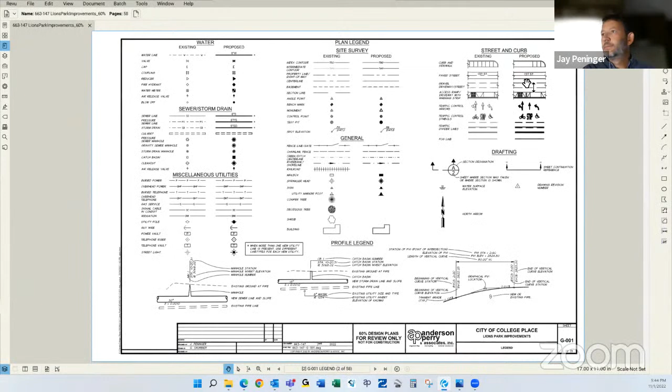So we've broken the site up into 4 areas just to make the plans work better. You see area 1, 2, 3, and 4. We'll zoom into each spot, talk about what's going on in each area, some decisions that are being made, and then go over the more interesting things like the playground equipment. I know parking lots and utilities aren't always the fun part, but let's go to that first area.

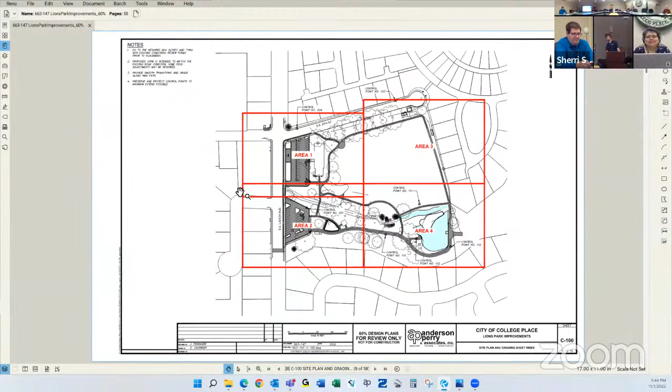So the northwest portion of the site is mostly the existing parking lot. We're updating that parking lot, keeping the RV sewer dump there. We've, with input from Public Works, realigned how the parking and the RV dump interact. We've got more accessible parking, and we're updating the accessibility into the existing building.

In this one, you also see the new playground just to the south of the existing building. Later on I'll show you a bit more. We are remodeling the bathroom there. One thing to note, the park board had comments on the islands within this parking lot, so we're going to address that between now and the next revision to make sure it's still as accessible as possible for the RVs.

So that's high level what's going on in this part. You can see the path that loops around the field - a big loop that goes all the way around the park with some workout equipment stationed around it, and it has lighting. We'll go through that lighting in a minute. It will have markers so you can know if you want to run a quarter mile 6 times, or whatever distance - there'll be signs for that.

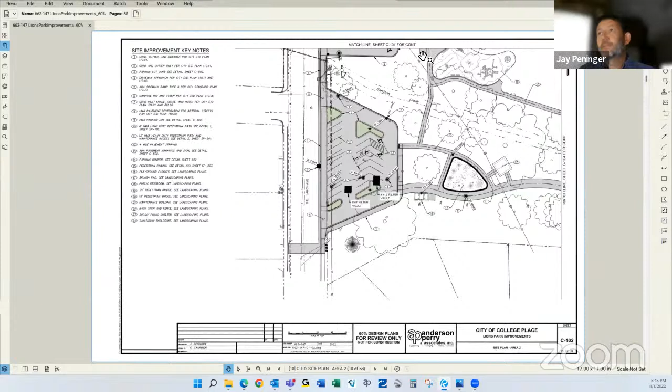The more exciting part of this is just east - you see the black triangle, that's the splash pad. Just to the south of that, southwest of that little rectangle, is the proposed restroom. To the east of the splash pad is the picnic shelter. There's a requirement for a splash pad to have a bathroom within it, so there will be 2 bathrooms in the park now. There's some bike parking here, and some up at the other area I didn't mention. The sculpture that's currently by the playground is being moved to that area.

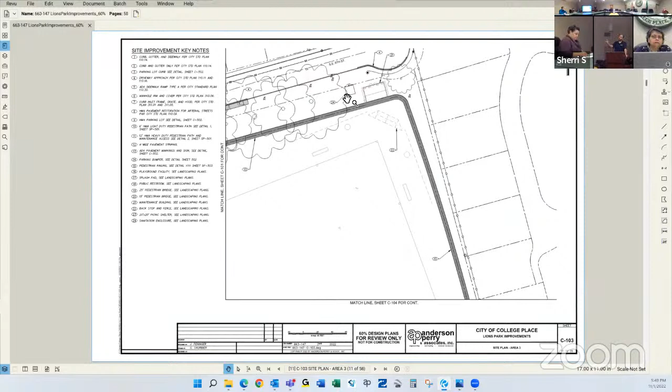The northeast corner doesn't have a whole lot to talk about, but there is a proposed maintenance storage building just north of the path, and a trash enclosure for the park. We will be putting in a new backstop - the existing structure will go away, but there'll be a new one. Again, you can see the path that goes all the way around the park. There's pedestrian scale lighting all around the walking path and plenty of lighting in the parking lots for cars.

Just a note here, the plan is to upgrade the irrigation within the entire field so that we get a nice product for the field. And then the last corner of the site is the pond and the stream.

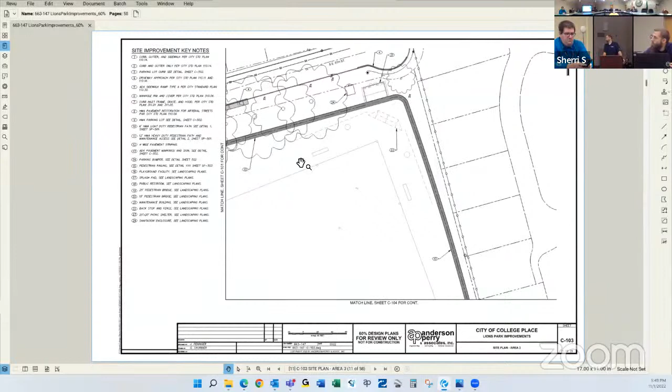Also in this area, we will have an aeration system that pumps air into the pond to keep circulation. Part of the couple issues with the current pond: it's so big compared to the amount of flow, and it's also off to the side of the creek, so circulation doesn't happen very well, and that pond gets a lot of algae.

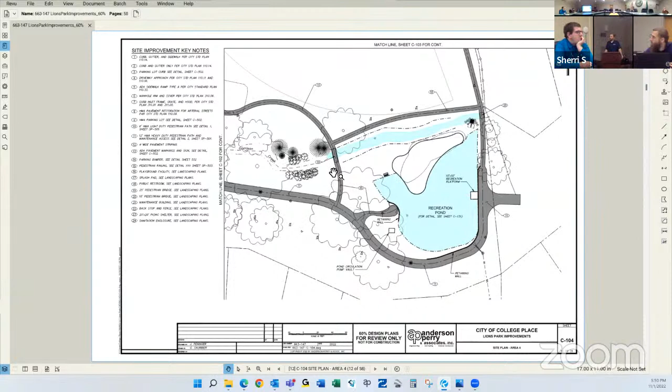And the other thing is, I mentioned stormwater. There's a stormwater pipe that comes straight down the hill from the development, as you can see on the screen, and currently dumps straight into the pond. So that stormwater from the previous development is not treated, and any sediment that came down ended up in the pond. So we are routing that pipe all the way over to the parking lot to those stormwater vaults I talked about. That's part of the Department of Ecology grant.

You can see here that the pathway on the south side is substantially wider than the rest of the pathways. That is the route that's currently used to get fire access, but also tree trimming equipment, to the HOA property east of the park. So we're making sure there's still a route for that to happen. How wide is that? It's a 12-foot path there. I just wondered what that was for. Yep, 12-foot path there, and then you can see the turnaround, and that also is the point where there's a gate into that adjacent property on the east edge.

Immediately adjacent to that turnaround, you'll see the little white square in the pond. That's an ADA accessible fishing dock. It's part of one of your RCO grants.

Excellent. Councilmember Jessup? I had two questions real quick. How much does this reduce the pond, in terms of, because it's got more flow - there's an inflow and outflow separate from the creek, but there's still going to be more flow. Does it reduce the pond? Like, you've got the island, right?

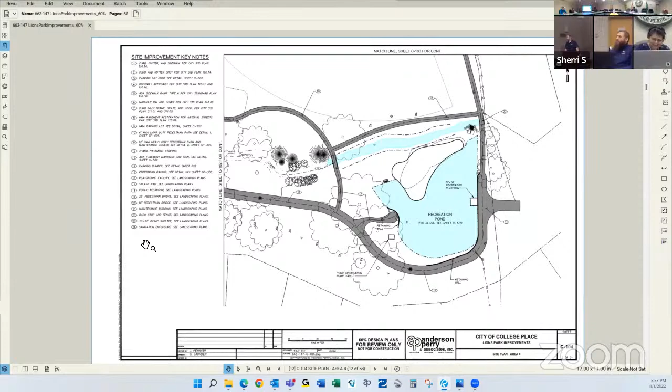Jay, you want to keep rolling through the plans then? I kind of hit the stormwater part, so we can probably move on. So these are all just the point shot gradings.

Here's a better view of the pond itself. To follow up on a previous question, you can see the original edge on the south end and how it rolled through. One thing to note is we're adding 4 to 5 feet of depth in the pond, which will enhance the fish habitat. I felt it was worth touching on since it was a question.

It's just under 10 feet deep. This one we left in the existing concrete pathway that's falling into the pond, so that gives you a better idea of the reduction on the south end.

A quick question, Councilmember Espinoza: what is the current depth of the pond? It's at 805 down to 803, and we're establishing 801.5. The elevation is still being tied in to make sure we can get that 10-foot depth. We anticipate an 811.5 finished surface of the pond.

Does that pose any sort of risk or safety hazard for little children or users, specifically around the pond when they're fishing? Anytime kids are around water, even as it is now, there's always going to be a risk, but we are establishing a very shallow 3-to-1 slope, a gradual slope, so if a child does get in there, it's not like they're going to drop off an embankment.

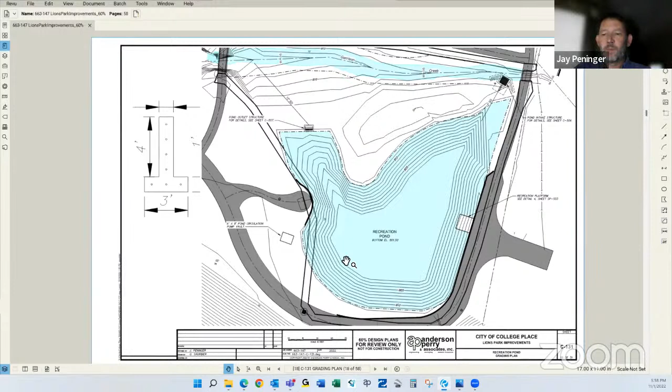I would say we're improving the situation over what exists now, since it's basically sludge right now, and if a kid were to fall into it, that's more dangerous—you might lose them in it, the kid could just sink down into it. I will say that 3-to-1 slope is what you'd consider a standable slope; if you were on it, you could fairly stand up. That was one of the things we put into the pond design, to make sure it wasn't a straight drop-off to an 10-foot deep pond.

Anytime you have a pond and open water, there is inherent danger. We've attempted to offset some of that with the way the depth of the pond is created.

John, I assume we'll have signs telling people to watch for children or something like that. I don't think we have any sort of signage like that right now. Our insurance company is aware that we have a pond. The pond has been near those depths before, it's just filled in with sediment. And we don't have anything right now saying watch your children or anything, right? I don't think we do. Okay, just asking, thank you.

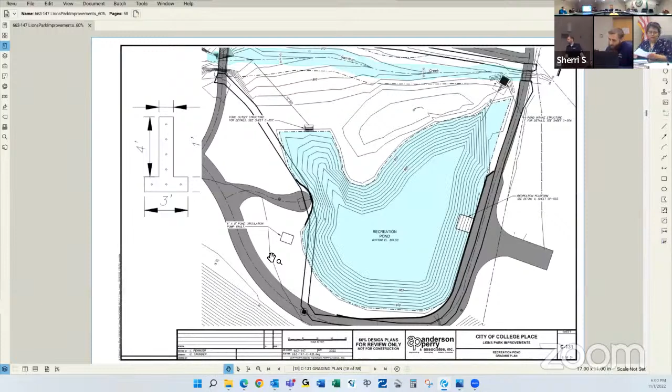All right, Jay, you want to take this back to the landscape plans? I think we kind of hit stormwater enough, we can pass those.

Still going? Did we lose him? We would have lost you. So there we go—you want to keep going, Jay? I apologize, I have bad speaker quality. Do you want me to keep going? Yeah, go to landscape.

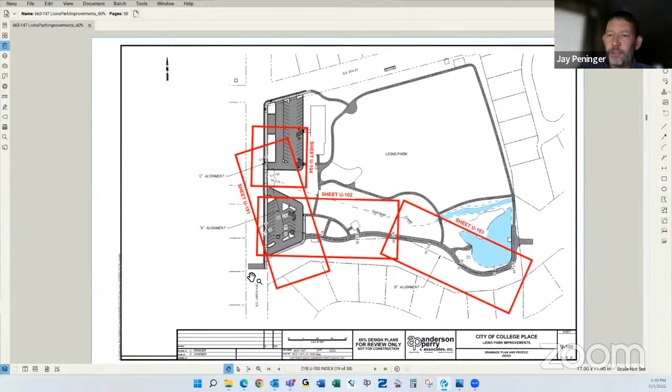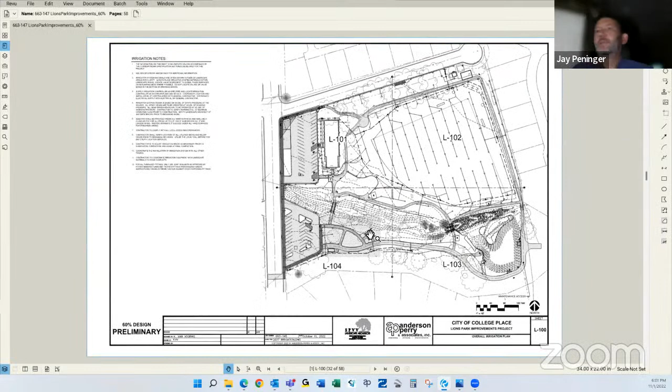These are just construction details for all of the items addressed previously. So at the beginning of the landscape, you can see all the lines across the field. We are again upgrading the irrigation system so that you have a nice system.

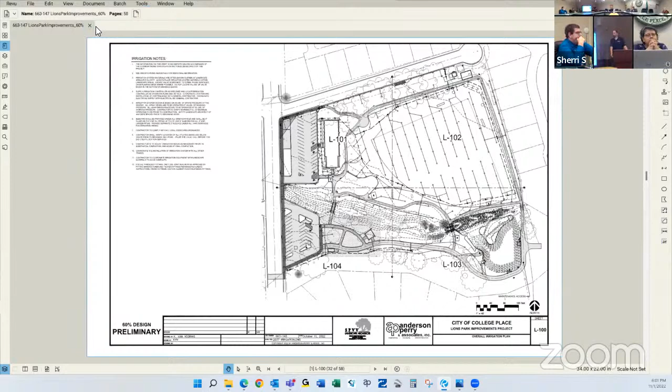Next one, Jay. Next—oh, you got it, okay. Keep going, let's go to the one with the playground on it.

In the upper right corner, there's a merry-go-round type toy, which you can see in the top middle. Just to the west of that is the big, typical park play structure in the bottom right-hand corner. It's got the slide and the climber.

There is a swing right in the middle, and you can see that's an accessible swing. If you look at the picture at the bottom—I know it's a little hard to see on the screen—it's intended so you could put someone with a disability into the swing and they could still use it.

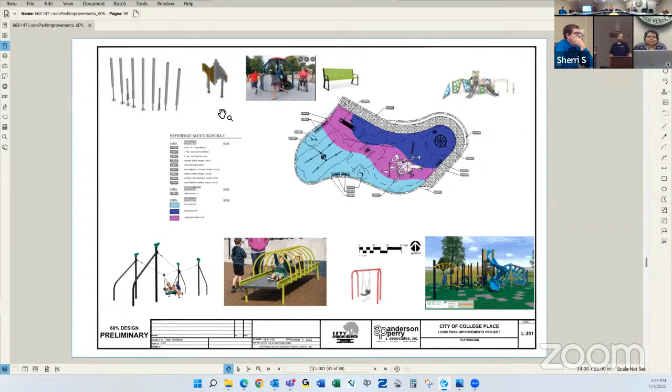So there's some other smaller pieces too—you can see some chime-type equipment in the top left. So a lot of variety. Many of these are inclusive playground items. There will be a fence all the way around the playground, and there are some benches within there for parents to sit and watch their kids.

So that's the current configuration of the playground. That's great, and I know we had a lot of requests for disability-inclusive, accessible toys. The fact that it's poured-in hard rubber allows someone in a wheelchair or with unstable footing to be able to use it.

Correct, that's excellent. Councilmember Williams would like to speak. Thank you, I'm really excited about this. I can't see from here what the three different colors mean—I see they're on the legend, but I can't read what it says.

I believe the surface will actually be those three different colors. Okay, nice, and the playground will be quite colorful. I was picturing that black, you know? Okay, so I like this much better.

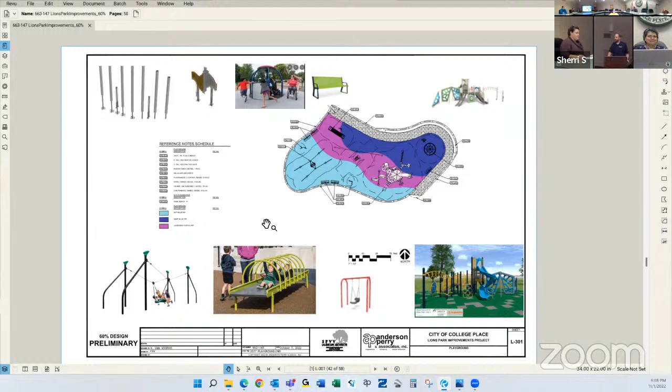Any comments on the very bright colors—obviously those aren't the actual colors of the product, they're the best we can do. I love it. But yeah, the intention is to have three very distinct, non-engineered shapes for the playground. So, do you want to flip to the splash pad?

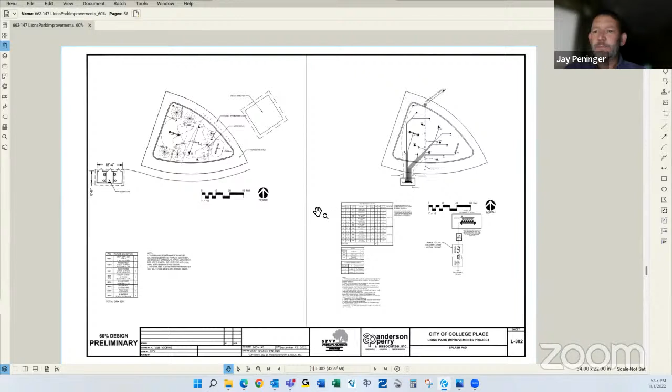Hold on. So, Brian, here's the schematic layout, and then I have the image that was provided. Yeah, I know I'm taking up more than the 10 to 15 minutes of your time, like I said, so we'll show the splash pad. Jay, can you pull up the other image? There we go, this is great.

We've got a few taller items. This one doesn't have—the current plan actually has two water cannons on opposite sides of this splash pad that kids can shoot at about a 30-degree angle at each other. This is kind of the scale of the splash pad items I wanted to point out. I think the tallest one is about 12 feet tall, and then there's a couple of 7-foot tall items.

And then some really tiny ones for toddlers. Correct, yep, that's great, and some tiny ones. That's where things are headed.

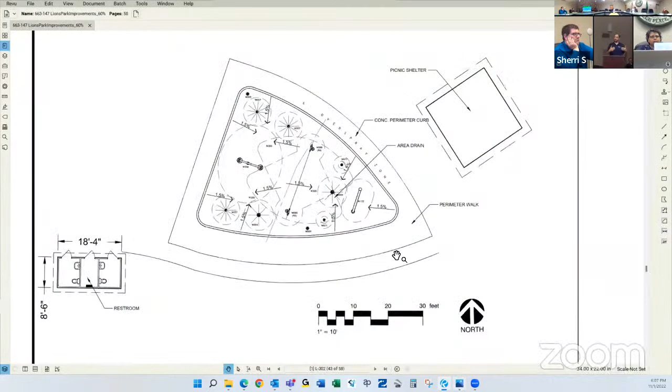Electrical wise, again, there's lighting around the pedestrian areas and lighting in the parking lots. There's outlets around the part of the path where the farmer's market normally goes. So that's in the plans.

The bleachers are being taken down and not replaced, but we are putting a backstop back. There will be a backstop, but no bases or infield created. If someone wants to play baseball, they can throw down their own rubber bases. We've made sure the little league field could fit there, but it won't be a cutout or a set field for baseball only.

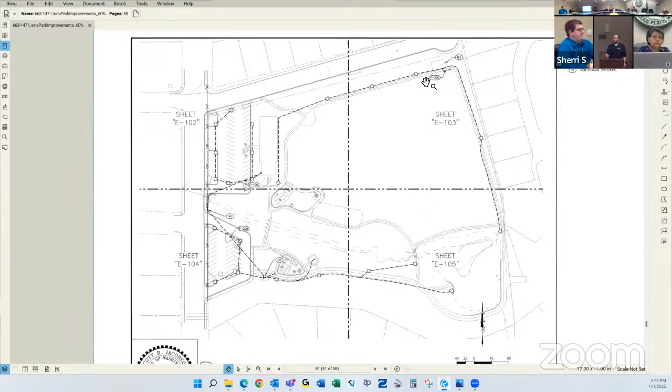John asked me to talk about permitting. We're working on sending 60% plans to the Department of Ecology for the stormwater grant piece. We've been going back and forth with RCO, which has 3 grants - 2 are state funds, and one, the pond portion, is National Park Service fund. We've been communicating with RCO on the cultural inventory we completed and have verbal confirmation it's complete, though not officially signed off yet. We're still trying to determine State Environmental Policy Act checklist versus National Environmental Policy Act checklist on the pond portion.

So we are going to complete a SEPA checklist for the entire project, identifying the different pieces and grants and parts of the project. That will allow us to complete environmental permitting on the playground, the field, the splash pad, and the parking lots. It may cover the stream and the pond, but it's not entirely clear - there may be an extra step. We've been having several conversations with RCO lately, hopefully we can get to the bottom of that soon. As far as schedule, it looks like we'd go out for bid in the first few months of next year to start construction in late mid-spring.

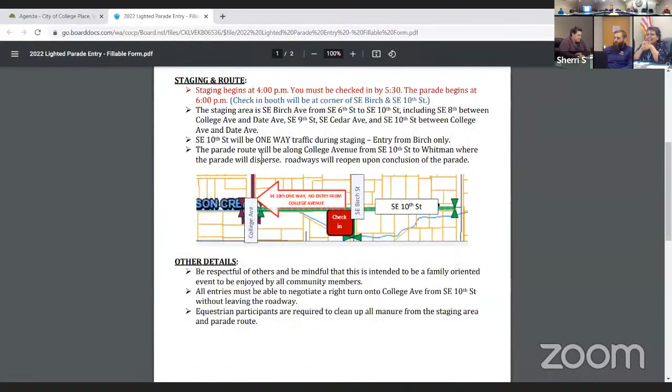Ms. Williams: I got a question the other day about the deadline to apply to be in the parade, and I said you can probably find out from the webpage. Well, that'd be too easy. I guess we don't have a deadline on this one. I think as long as they turn it in a day or two before. Honestly, in years past we had a deadline but people still showed up, so we actually reserve spots out on the street just in case, because people tend to randomly show up.

I would love to see more people, more cars, more bikes. I even told my husband we could put lights on ourselves and walk our dogs with little costumes. Encourage your friends, and ride with the big bike group. I think I'm gonna mention it to some of our engineering clubs, I bet they could come up with some fun stuff.

That'd be awesome. One thing I'd like to see is if we could get some additional outreach with the university. The first year I was here, actually the second, in 2017, it coordinated with one of the anniversaries of the university, and the amount of entries in the parade was like double what it was in other years. It'd be good if that participation could bounce back. I'll suggest that to the engineering clubs, they're the only ones I have clout with.